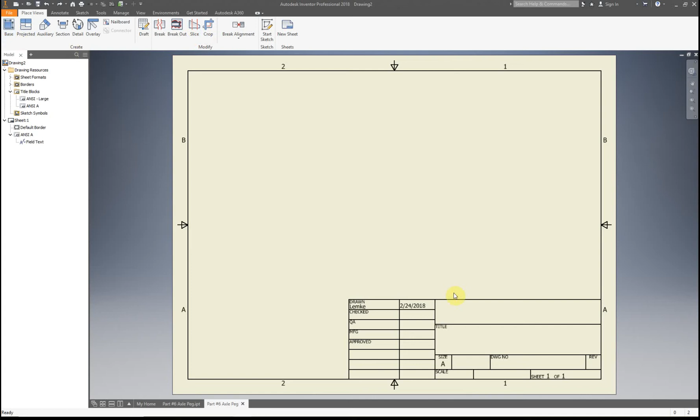Now that we've finished part 6, our axle peg, I'm going to show you how to set up your work drawing. First things first, you're going to make sure it's an A size paper, and I've already done that just to speed this video up a little bit.

So we're going to go to base. I set my scale to 3:1. Personally, I think it fits a little bit better on this page because we don't need a right view, since it's going to be identical.

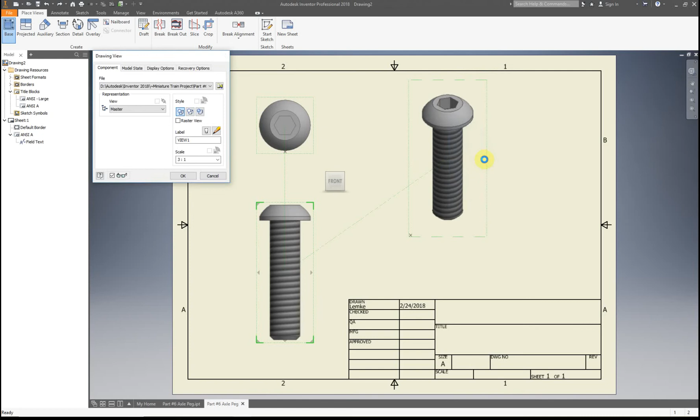Alright, so you're going to put in top and isometric, right click, and OK. So you can see how the thread kind of vanished on everything. That's fine. For this one, you're now going to see these hidden lines. Those hidden lines show you how far the thread's cut into your axle peg.

Alright, now we got to make sure this one's shaded. And you can see the thread just shows up again. So it's very visible that it is actually thread in here by looking at your isometric view.

So some new things for dimensioning. If we go in here, we can go to our hole and thread tool. And if we click on this line right here and move over, we have right now our information for our thread. So we now know that it's a 1/4 inch with 20 threads per inch, and it's coarse thread. So we have all that information in there right now without having to type that in, which is very nice.

Alright, our next thing is our chamfer tool, which is right here. So this is going to put in that chamfer that we have at this very bottom. So this tool is a little weird, so you got to click on this edge. Then, never mind, did that backwards.

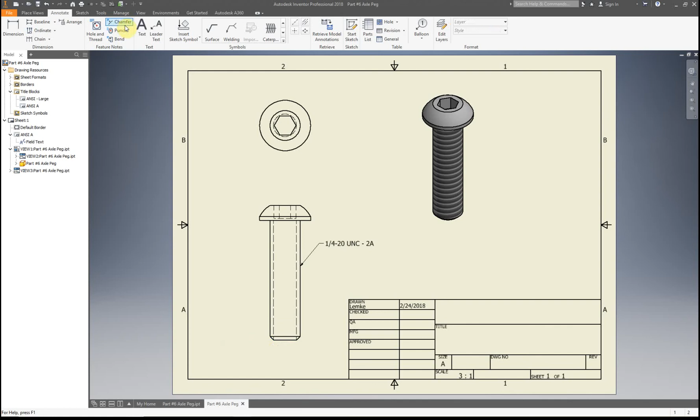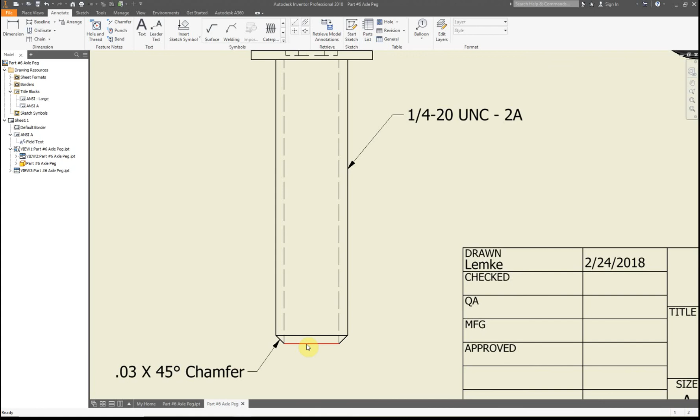Alright, so if the chamfer ever shows up in the wrong spot, then just click on the other ones. So this one, then the bottom. Okay, now it's in the right spot. So if you have that same problem that I just first did, super easy fix - just cancel out of the tool, go back into it, and click on the one that you want. So, angle, then the bottom. Easy enough of a fix.

Alright, the third thing that I want to show you is leader text. This is what you use when you need to actually type something in and it's not going to pop up automatically for you. So, leader text - that's going to be for this hex socket right here.

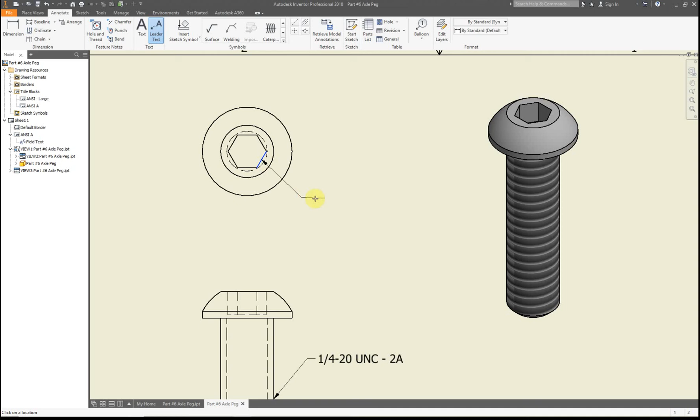So for this one, because I want it to kind of look a little nicer, I'm going to make sure it's on this green dot. Click over here, right click, continue. Now I have this text box.

So if you look at your handout, you're going to see what you should be typing in. I'm going to type it in properly here for you, just so you can see what it is, and also a little thing that's going to pop up. So I have caps lock on to make it easier. So we have hex, sock for socket, HD.

And then this is 5/32nds, across flats. Alright, and then this is going to be for our next line, 0.111 - that's point and then 3 ones - deep, because that's how far in it was cut.

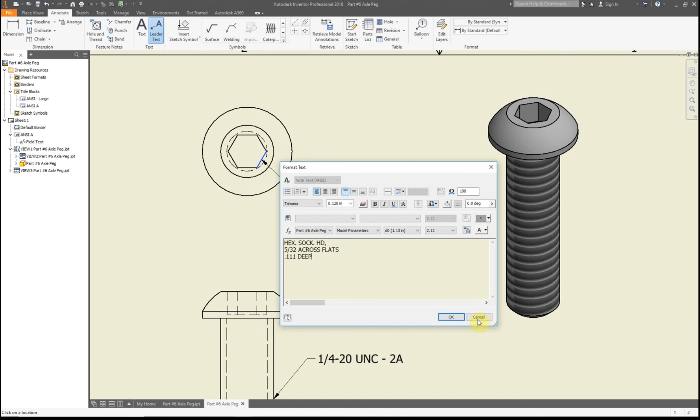Alright, and then click OK. So I didn't have the pop-up that sometimes happens, I guess that's because I did a test video first, but sometimes there's a pop-up asking you if you want to turn this into a fraction or something. For this one, you could just leave it like this and not turn it into one character.

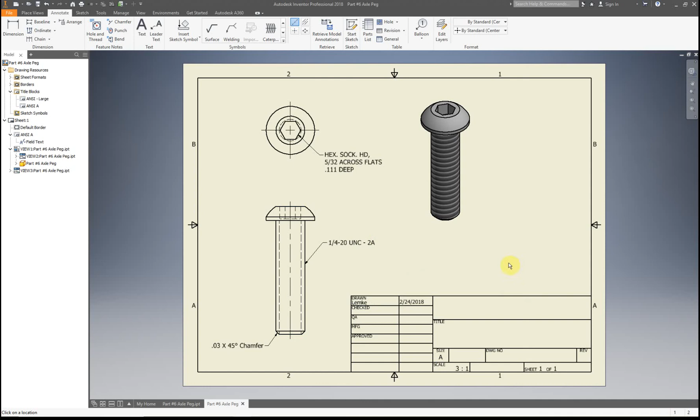Alright, so those are kind of the things that I haven't gone over in previous videos because they're new for this part. But just kind of a little bit of a review - make sure that you have your center mark and also your center line for this object. This kind of just places in the new things. And then also, don't forget, now that I've gone over the basics, add your dimensions. Good luck with the rest of this work drawing.